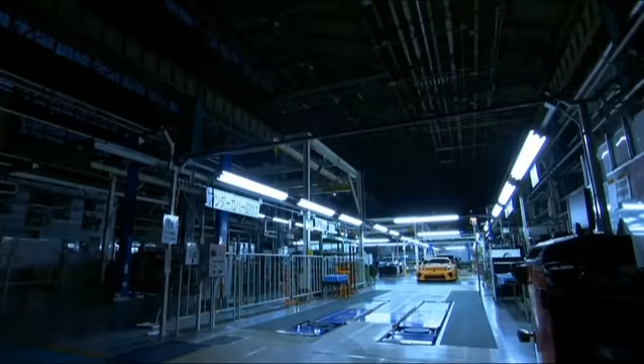Inside this top-secret megafactory, a car like no other is taking shape. Craftsmen hand-build what they consider an automotive work of art. Money is no object. This machine must redefine a billion-dollar brand. Failure is not an option.

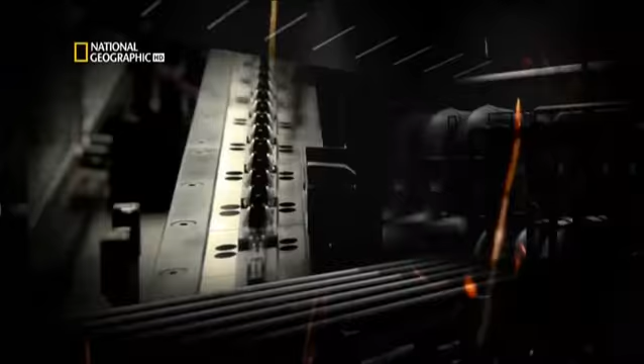Japanese marque Lexus sells itself on luxury, marketing its cars as elegant, quiet, high-tech, and efficient. Now, a different kind of car wears the Lexus badge, the LFA. Aggressive, loud, agile, with the highest revving V10 engine in a production car, reaching 325 kilometers per hour. A car like nothing Lexus has ever produced before.

Lexus is just over 20 years old. The world's largest car maker, Toyota, created the brand to compete with other high-flying luxury marques: Mercedes-Benz, BMW, and Jaguar. It's worked. Lexus is now one of the biggest selling high-end marques in the United States. But now, Lexus is out to inject more excitement into their brand.

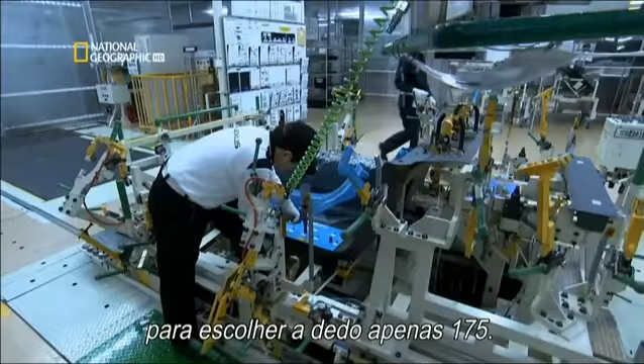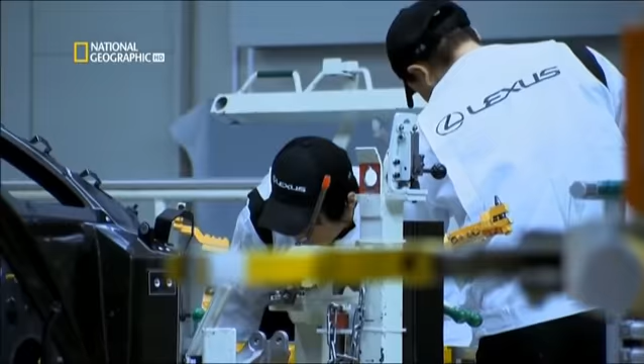All the associates here at the LFA Works feel they are artisans, not just operators. These artisans are known as takumi, Japanese for craftsmen, a status only conferred on the most highly trained, skilled workers. Each and every associate at the LFA Works is seeking to achieve perfection, taking this challenge on with a sort of samurai spirit.

Yamanaka Shigeru is manager of the LFA Works. His teamwork credentials come from another time-honored Japanese tradition: baseball. Before this, I was working as manager of the Toyota Motor Corporation baseball team, which brought people together from lots of different factories. It was because I could manage that organization that I was made manager here.

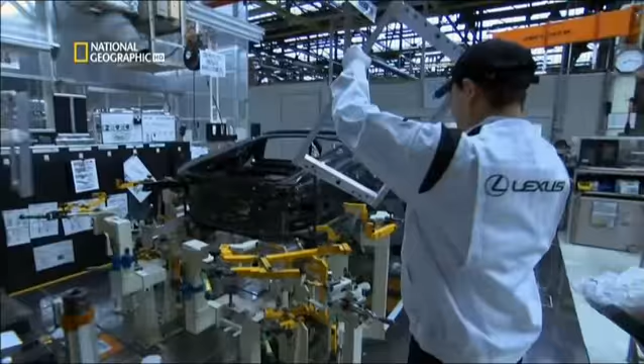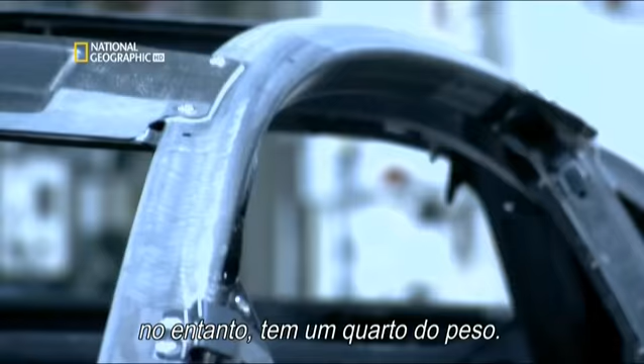To reach their goal, this tight-knit team utilized sophisticated tools and materials to build their car. The most important of these is carbon fiber composite. Carbon is crucial to the car's performance. It's a material 5 times the strength of steel, yet a quarter the weight. It's the construction material of choice for both Formula One racing cars and the aerospace industry.

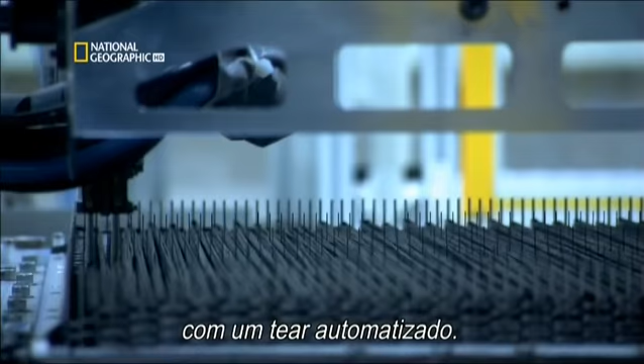The company even make their own carbon fiber here on site. Up until now, no television cameras have ever been allowed inside this top-secret facility. First, simple strands of carbon fiber are woven into a pliable cloth using an automated weaving machine. This fabric is then transformed through heat, pressure, polycarbonate resin, and labor-intensive techniques into the car's core, known as the tub.

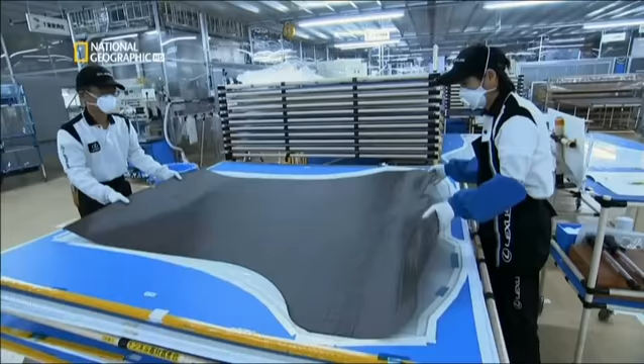The tub is pieced together like a 3D jigsaw. It starts with the construction of the floor. To make it, precisely cut carbon fiber cloth is lifted onto a mold. Next, skilled takumi smooth the supple fabric over the mold. This one is for the transmission tunnel that will house the drive shaft and exhaust.

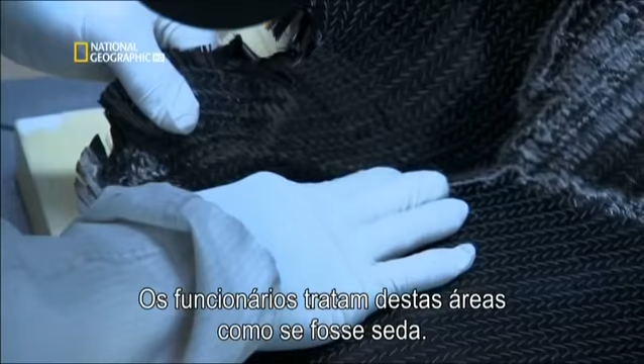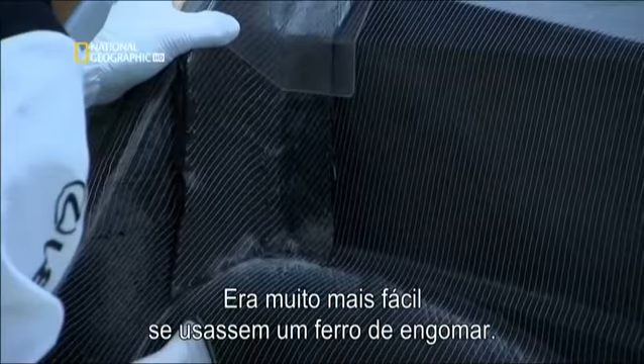In very complex areas like this, the fabric inevitably becomes frayed and not very neat. The associates work with these areas as if working with silk, taking great care every day. They also wear masks to avoid breathing in the hazardous fibers. In the beginning, the associates found it very difficult to work this material. It was much easier when they used an iron.

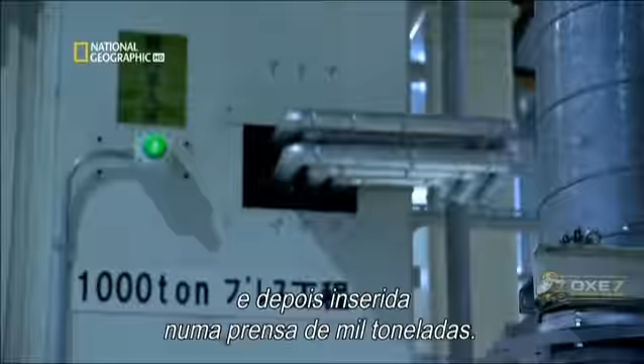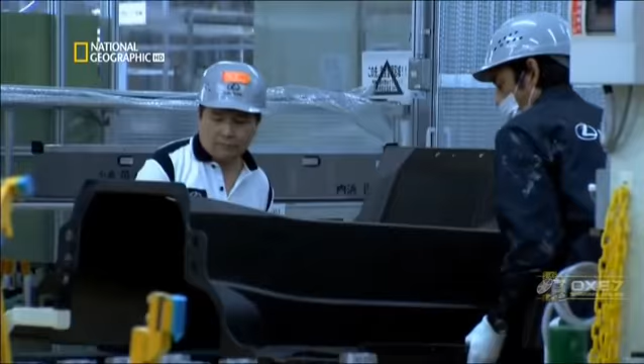Back in 2000, the concept of a world-beating supercar only exists in one man's head. At the company, I talked to just a small group of people at the top, not expecting anything, and they said, go ahead and try.

With permission to proceed, Tanahashi gathers a team of engineers around him, and they start to make the basic engineering decisions. In the beginning, we planned to make the body from aluminium.

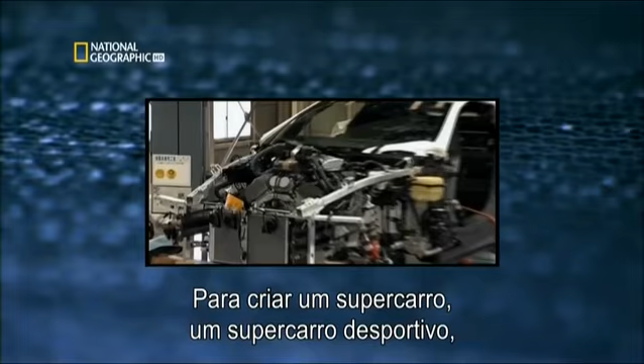But Tanahashi is fascinated with the possibilities offered by carbon. Developing a supercar, a super sports car, carbon fiber was a material I really wanted to try using, if at all possible. But this wonder material has its drawbacks. It's expensive, and the company has never used it to build any of their cars before.

Despite these significant challenges, Tanahashi gets his way. In 2005, my boss said, why not go for carbon? Slapping me on the shoulder. And I made the decision to go for carbon then.

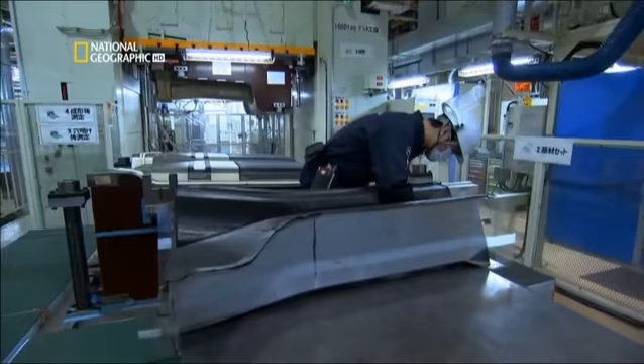It's a bold step. Everyone involved with this project must master a material they have no experience with at all. It was the first time the workers had touched carbon, and everything about it was difficult for the workers.

In the state-of-the-art carbon fibre facility, the Takumi are returning from lunch. They vacuum themselves down to remove any foreign particles before entering a highly confidential sealed room. Here, the majority of the tub's central frame is created using the most intricate techniques.

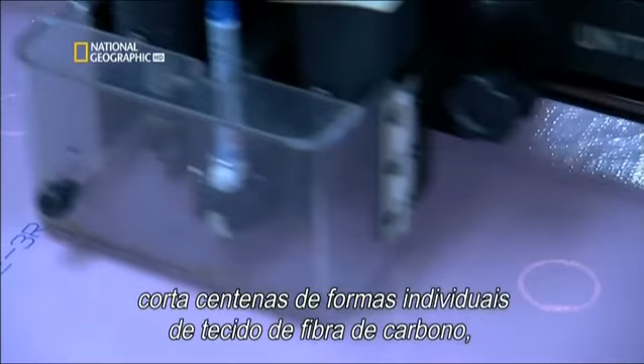In this process, an automated laser cuts out hundreds of individual shapes from carbon fibre cloth that's been pre-impregnated with a sticky resin.

Next, Takumi layer the cutouts, up to 20 sheets deep, onto a mould. This one will make the right side panel.

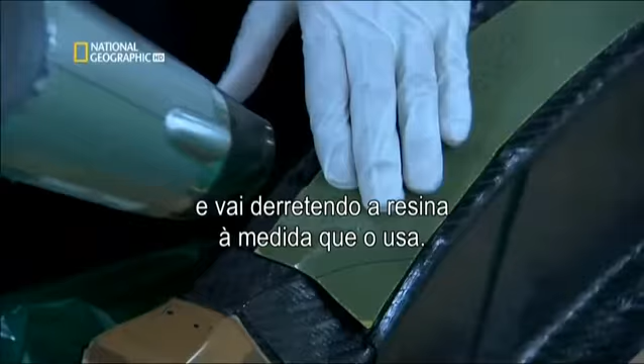The associate uses a dryer to raise the temperature of the laminate and half melts the resin as he applies it. The tacky cutouts stick to each other and any gaps are squeezed out using a vacuum bag that forces them together.

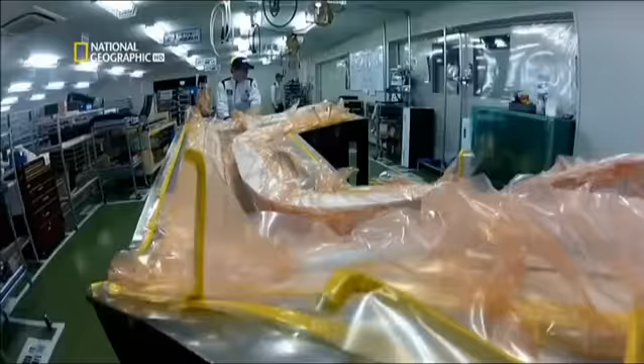The shrink-wrapped side panel is then wheeled across the works and loaded into a pressurized oven. Baking overnight at 150 degrees Celsius sets the resin, resulting in a side panel that's both ultra-strong and ultra-light. An aluminium equivalent would be twice as heavy.

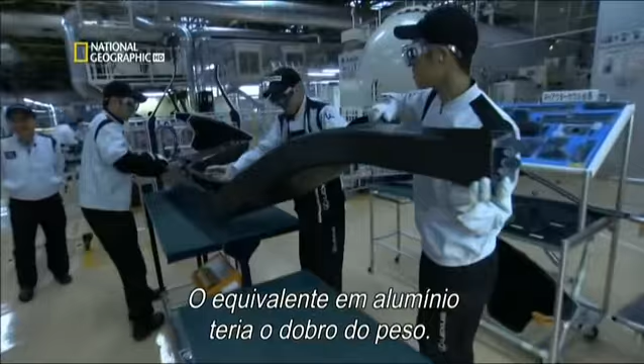Weight saving is the holy grail for all auto engineers. Less weight and more power leads to increased acceleration, and speed defines a supercar. The body of the LFA is 65% carbon fibre, helping it accelerate from 0 to 100 kilometers per hour in 3.7 seconds.

If made of aluminium, it will be 100 kilograms heavier, like having a sumo wrestler in the passenger seat. As it is, this car weighs just 1,400 kilograms all in.

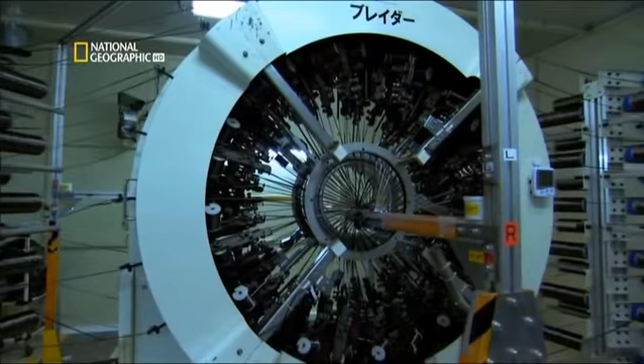Back at the factory, in a locked room, a bespoke machine creates two crucial parts to complete the tub's construction. The roof rails support the windscreen, as well as protecting the driver if the car rolls over.

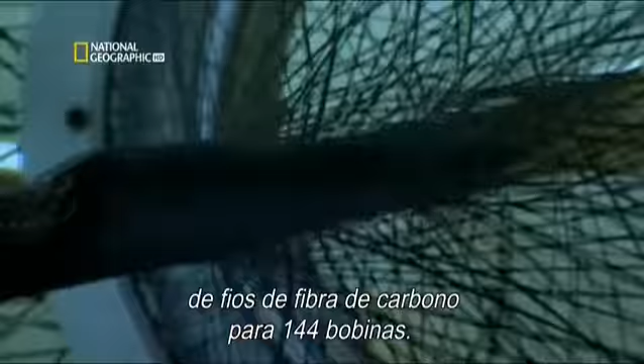This custom-built circular loom weaves the carbon rail in 3D. It uses lasers to control the feed of carbon fibre strands onto 144 bobbins. These knit the carbon around a top-secret automated template that's fed through the centre of the loom.

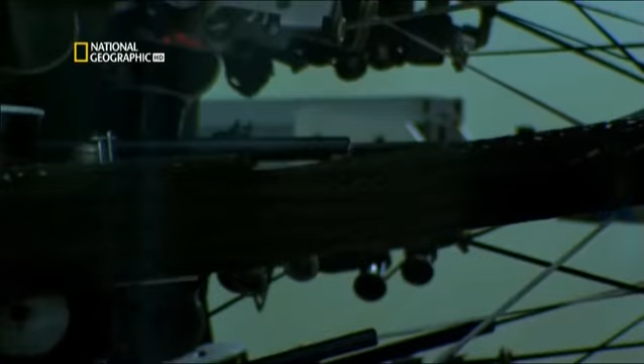This is done twice over to cross-hatch the carbon weave, so giving the rail its strength. The whole mechanism has its own control box, and for good reason. If something goes wrong, even a little thing, the shape gets distorted immediately, so the operator constantly pays attention to avoid this.

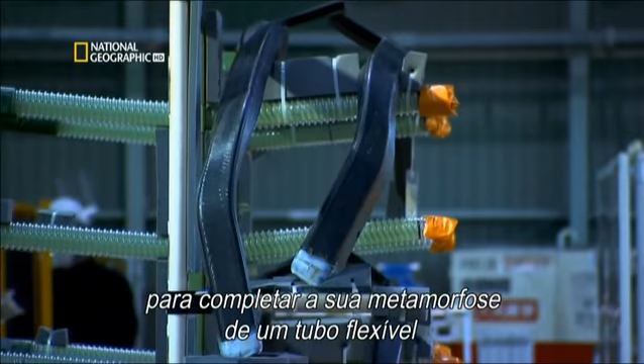The side rail is heated and impregnated with more resin to complete its metamorphosis from a flexible tube to a rock-hard rail. You may think that this is quite heavy, but it is only 2 kilograms.

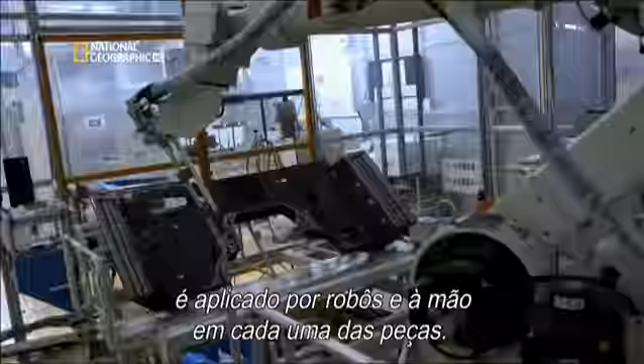The tub is bonded in another top-secret jig. First, a super-strong adhesive, known as epoxy resin, is applied by robot and hand to each of the parts. The separate parts are transferred to the jig and locked in place. Pop rivets keep the pieces aligned.

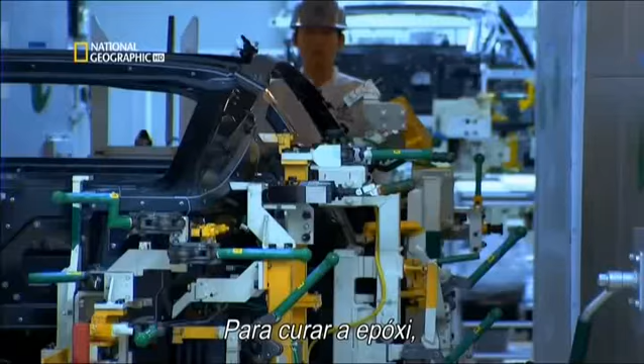To cure the epoxy, the jig is pushed into an oven and then baked for 60 minutes at 60 degrees Celsius. The resulting tub is so strong, it acts as both the structural core of the car and as a crush-resistant safety cell should the car crash.

The challenge now is for Matsumoto Kengo, chief designer of the LFA, to create a car with a body as technical as it is elegant. For us, aerodynamics, heat and airflow management should be tangible in the design.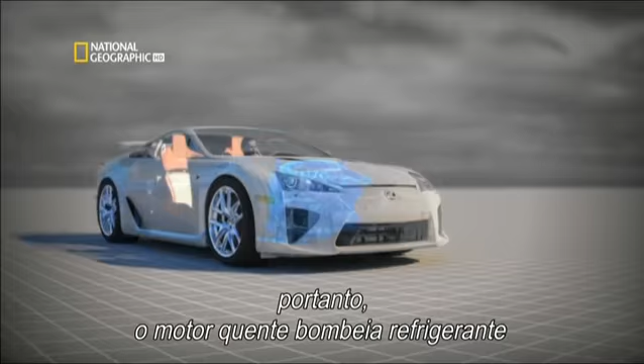A conventional car cools its engine with forward-mounted radiators that suck cold air through a front grille. Not the LFA. Front space is at a premium, so coolant is pumped from the hot engine to twin radiators mounted behind the car's rear wheels. Matsumoto had to shape the car to funnel cold air to these vital components.

Airflow management is optimally controlled by setting the angle between the door mirror and the cabin. It goes past the cabin and smoothly into the air intake for the rear radiator. This shape is not just for styling. The intake is deliberately formed here, from the base of the glass. The result is an airflow system capable of cooling the engine even under the most extreme race conditions.

It's 8:45 in the morning at the LFA works. The Takumi are warming up for an 8-hour shift ahead. Their first task is to greet the bare cabin as it arrives from its 15-day build in carbon round the corner. In assembly, the cabin will progress through 4 positions: trim, chassis, final, and alignment.

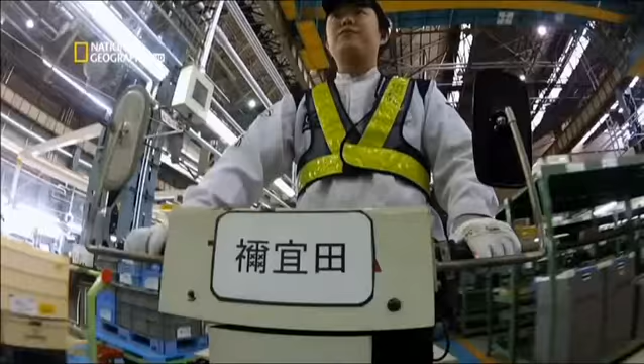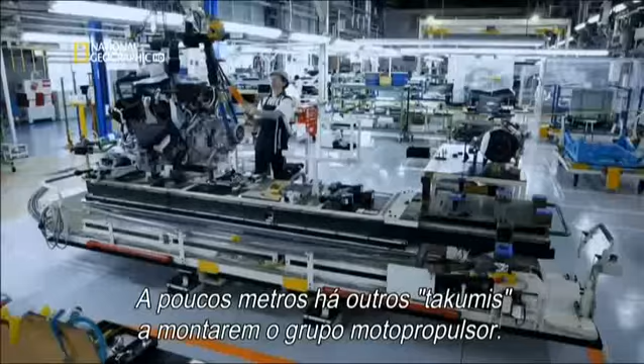15,000 parts go into making an LFA. The first of these are attached here in trim. Just meters away, other Takumi assemble the drivetrain and suspension. The drivetrain comprises the transmission, torque tube, and last but not least, a 4.8-litre V10.

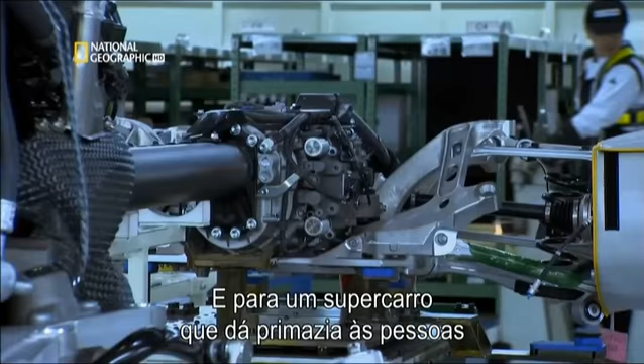The location of this engine is crucial to the car's entire concept. I wanted to build the car around the people in it. And for a supercar that puts people first, the optimum place for the engine is front mid. This front mid location puts the engine between the driver and the car's front wheels. With the transmission placed at the rear, the driver is in the centre and the car feels balanced to drive.

The aim is to make the car's handling as good as possible. But a front mid configuration dramatically restricts the space available for the engine. Tanahashi has a problem. You need an engine of a certain size with a certain degree of compactness, but you want a high-powered engine as well.

Tanahashi needs a small engine to fit in the restricted engine space, but he also needs the power of a large engine because power equals speed.

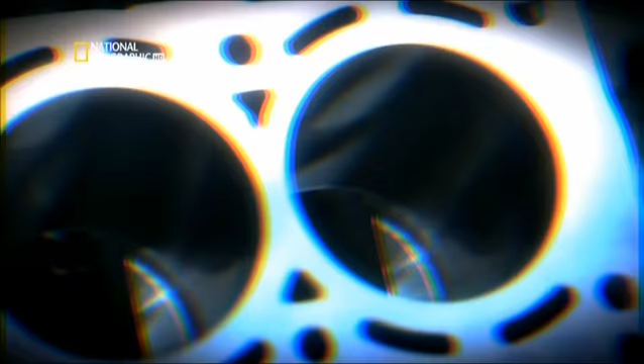And that isn't all. The high-pitched sound of Formula One makes you shiver, doesn't it? I really wanted to have that as part of the LFA. Only a high-revving V10 engine supplies this combination of power and sound, but a traditional V10 is too big for his mid-front configuration. Lexus have made nothing like this before. Their production line cars use 6- and 8-cylinder engines engineered for a super quiet ride. This V10 will be the opposite.

Tanahashi turns to some old friends for help. We are a motorcycle manufacturer. We understand power alone is not enough in a vehicle. For a sports car, small and lightweight is critical.

For almost half a century, Yamaha have worked with Toyota to create high-powered lightweight engines and cars. The legendary 2000 GT, star of the James Bond film You Only Live Twice, and Japan's first true sports car, was the first fruit of their collaboration.

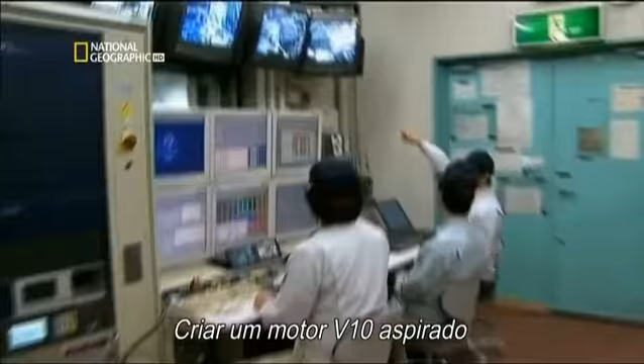Headed by Lexus engine guru Okamoto Takemitsu, the team sets itself an ambitious goal: to create a naturally aspirated V10 engine as compact as a traditional Lexus V8, with the weight of a V6. I wanted to create something different to any other supercar engine.

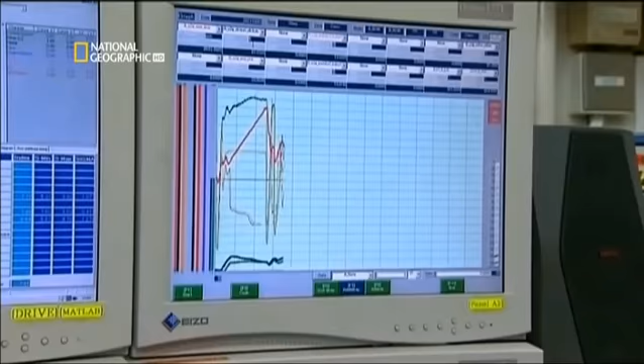Normally, engineers use turbochargers to boost the output of smaller engines to simulate V10 power. But turbocharged engines don't have the rapid response, acceleration or sound of a naturally aspirated V10. By using Yamaha's motorcycle know-how, the lightest metals and redesigning the engine's guts, Okamoto creates a masterpiece of engineering - a non-turbocharged compact V10 that fits into a mid-front design while keeping weight to a minimum.

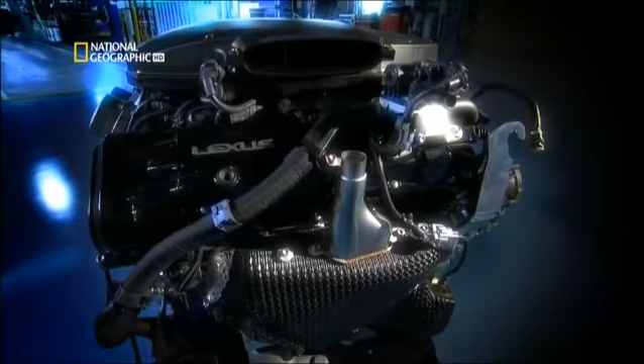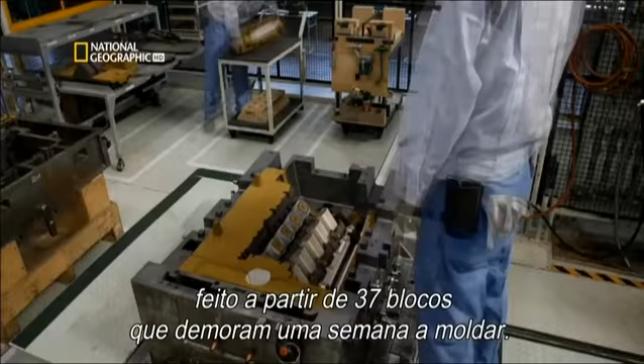The engine starts life in Toyota's Miyoshi plant as molten aluminium. It's cast in a 3D resin-impregnated sand mold made from 37 individual blocks that take a week to fashion. With the blocks fitted together, the mold is ready to be filled. At 750 degrees Celsius, impurities are scooped off the top of the molten aluminium.

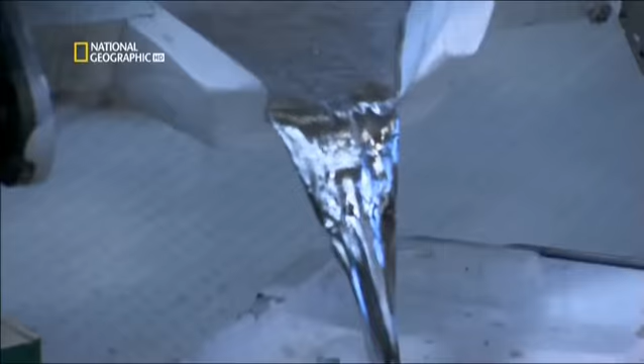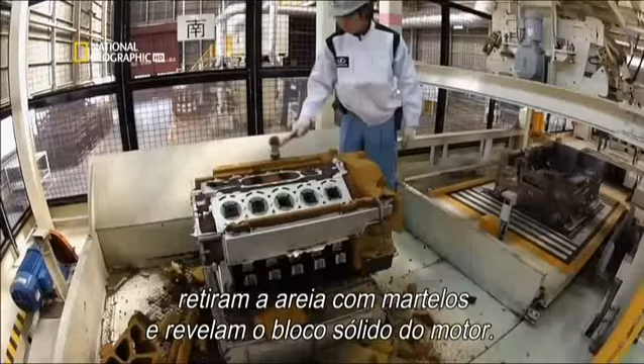The liquid metal flows into the mold as a vacuum sucks out any contaminating gases. Two hours later, with the metal set, the sand is hammered off to reveal the solid aluminium engine block inside.

It's off to Toyota City's Honsha factory and the company's highly confidential Formula One engine facility. These works are always off limits. We're going to go in. Are you ready? Come in. Television cameras have never been allowed in here before.

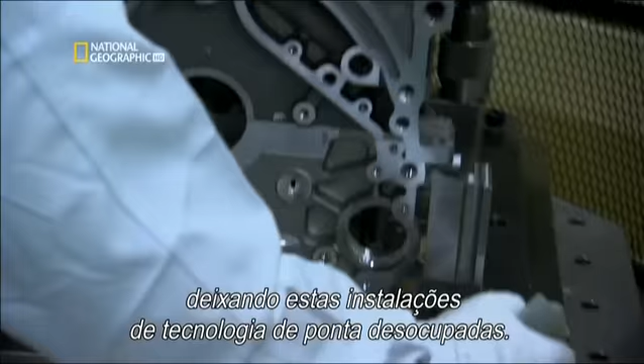For a decade, Toyota spent big competing in Formula One racing. But without a win in 139 races, they withdrew in 2009, leaving this state-of-the-art facility idle. For the LFA team, it was too good an opportunity to miss. The close parallels with F1 engine technology make this milling facility a ready-made fit.

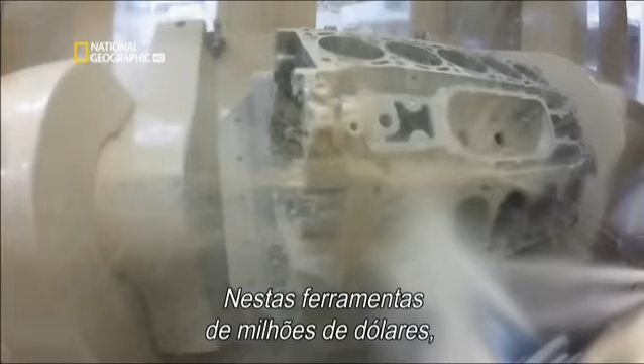In these million-dollar automated machining tools, the rough engine casts are milled, drilled and polished before emerging as precisely spec'd engine blocks.

Then the robots hand over to humans. In a sealed room, Takumi hone every sharp edge using precision polishing tools. Finally, a highly skilled Takumi pre-assembles the finished engine blocks to check they fit precisely. These blocks and heads are paired for life.

Disassembled, they travel as a unit to Yamaha's Iwata city plant, 90 kilometers southeast of Toyota City.

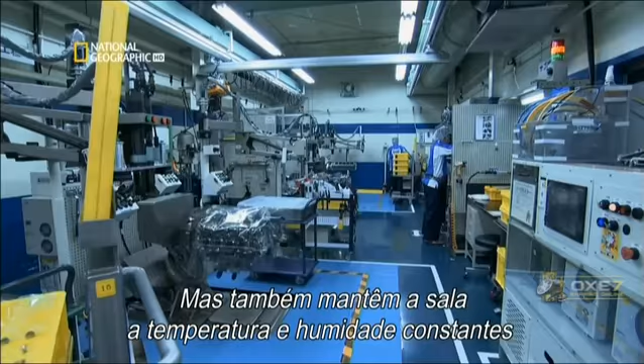The engine room here takes obsession to new heights. As you'd expect, hairnets and airlocks prevent any particle contamination. But the room is also kept at a constant temperature and humidity to ensure that every engine part is at the same state of thermal expansion during assembly. This is more laboratory than workshop.

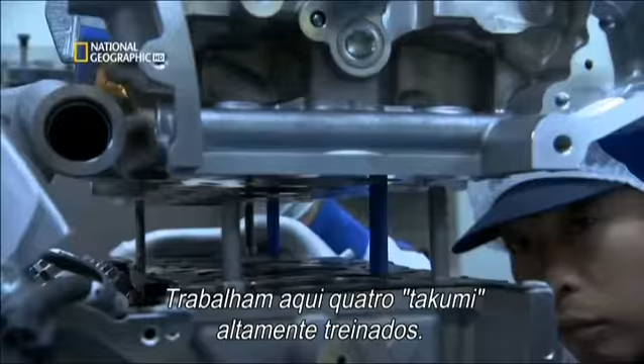The 2,200 engine parts are divided into 61 different kits for assembly by number. Four highly trained Takumi work here. Each is responsible for a single engine from start to finish. To avoid any mistakes, they follow a series of on-screen instructions. It takes 2.5 days to complete the build of one engine.

Each hand-assembled engine bears the Takumi signature.

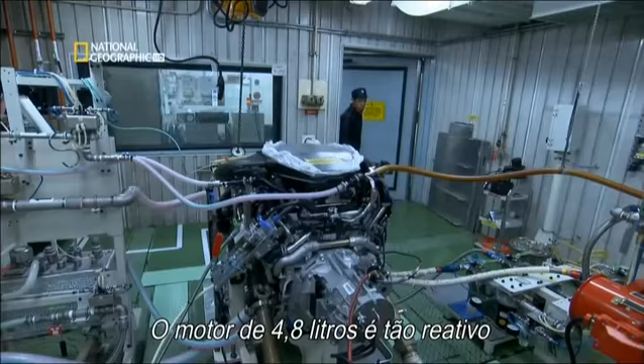Before this masterpiece goes anywhere near a car, it undergoes a half-day of exhaustive testing in the room next door to engine assembly. The resulting 4.8-litre engine is so responsive that it takes just half a second to reach 9,000 RPM.

That means instant acceleration, whatever gear you're in. This engine has excellent response and more RPM than any other commercially available engine. Response time is so fast that a digital rev counter is the only unit able to keep up. And the sound of this high-revving engine is unmistakable.

To achieve the engine soundtrack that Tanahashi insists upon requires more of Yamaha's specialist knowledge.

We are a manufacturer of musical instruments, so when it comes to sound technology, we have a certain level of know-how.

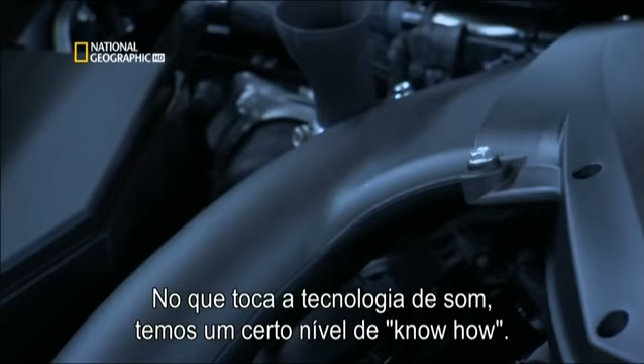Honji Yoshikazu is obsessed with sound. I think the relationship between a super sports car and its driver is like the relationship between a top musical performer and their instrument. When they play in a certain way, they can listen to that sound and use it to produce another, better sound.

Critically, a car has two different sound characteristics. One sound is the exhaust. You can call it an iconic sound. Just by hearing that sound, you know which car it is. The other, which we were particularly concerned with, is the sound heard by the driver.

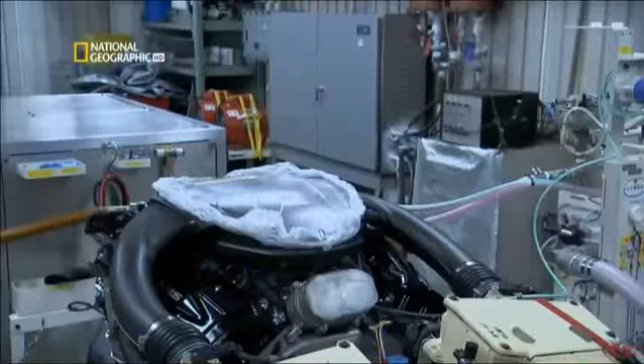To refine the driver's soundtrack, Heiji Maruyama, general manager of Yamaha Motors, had to redesign the component that sits on top of the engine, called the surge tank, by turning convention on its head. The function of the surge tank is to send air equally into all 10 cylinders.

Normally, techniques to reduce noise from the intakes are used. We thought to go the other way and use it to amplify the sound, to communicate it to the driver.

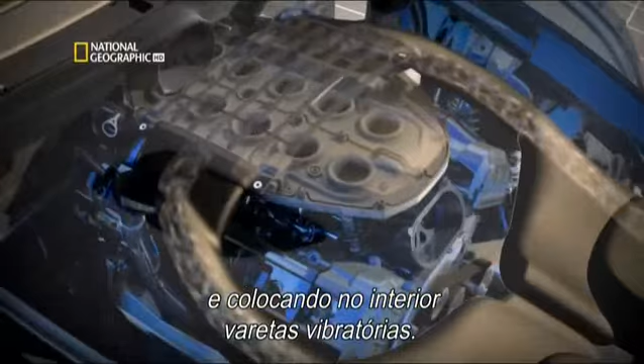Maruyama tunes the chamber by varying the thickness of the surge tank's upper surface and adding internal vibrating ribs. The construction is very like that of an acoustic guitar or violin.

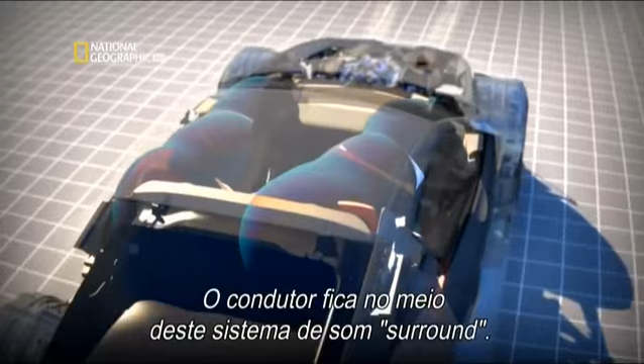The team channel these good vibrations back into the cabin using sound passages. We use these to send low-pitch sound to the driver's feet and higher frequency sounds through at ear level. The driver is in the middle of this dynamic surround sound system.

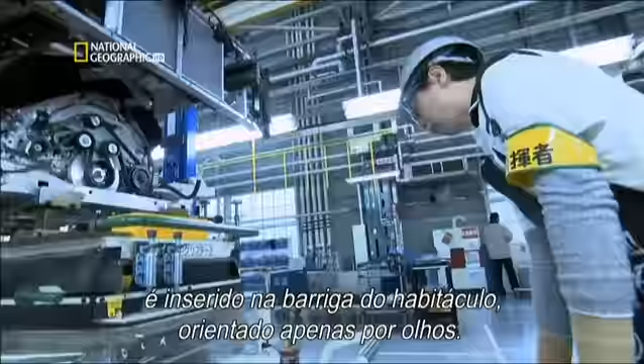The completed engine is forklifted onto a waiting truck for shipment back to the LFA works. Here, as part of the assembled drivetrain, it's inserted into the cabin's belly, guided only by eye.

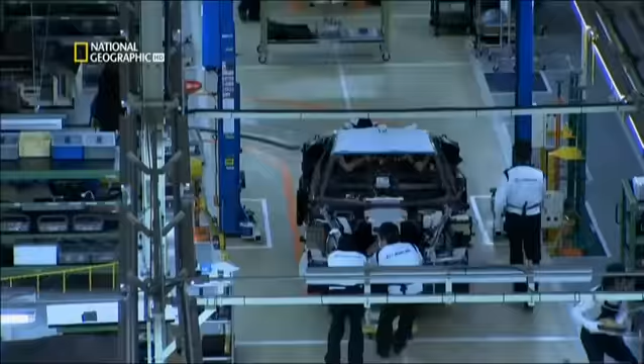With the guts of the car in place, it's time to feed them. An automated pump injects engine oil, brake fluid and coolant into the appropriate under-bonnet opening.

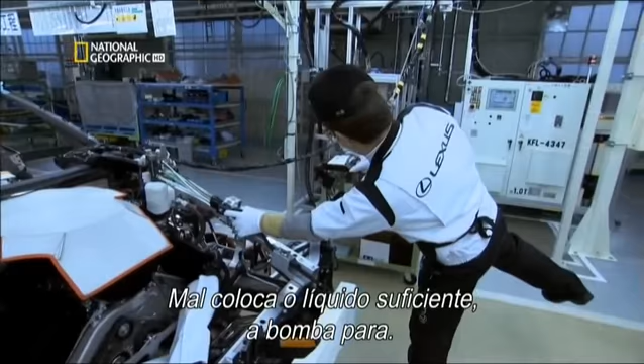In Japan, machines play a tune to alert anybody nearby that they're running. This one plays an American folk song. With the precise volume of fluid added, the pump stops, as does the music.

The car's 9 moulded glass fibre body panels are manufactured off-site. This material is both strong and light, but far cheaper to replace than carbon fibre, should the car crash.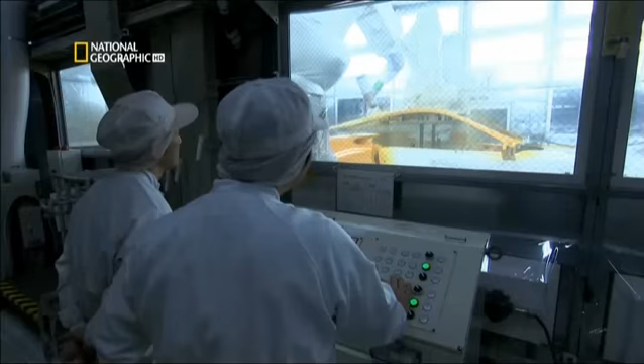The paint shop is under the same roof as assembly, but it's a very different world in here. At the LFA Works, paint is one of the few production processes performed by robot. The company believes they give a more consistent finish.

But there's always an ongoing human battle in the paint department. Dust is the greatest enemy for painting. If dust gets into the paint surface, when it's heated, the dust swells up and causes a blister. So the atmosphere is controlled on a daily basis, and there's a strict dress code.

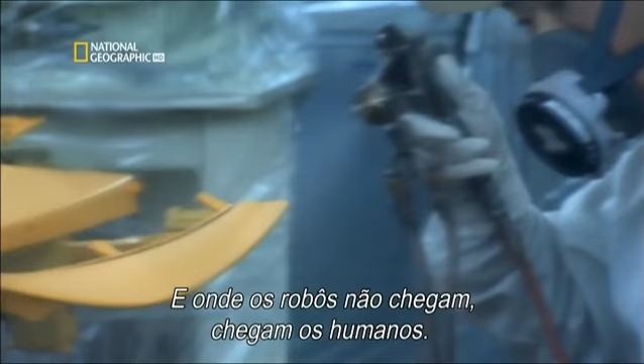Up to 5 layers of paint are applied, and where robots can't reach, humans can. Job done. The sprayed panels are dried in an oven at 100 degrees Celsius for 50 minutes, before being wheeled out for inspection.

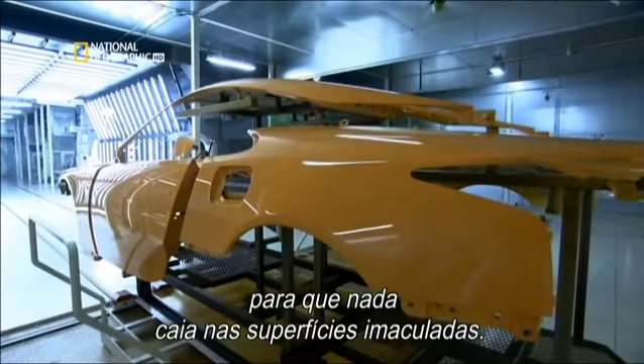The battle against dust continues, with water nozzles spraying a fine mist into the air to stop anything drifting onto the pristine surfaces. A bright light inspector spots any blemishes and marks them up to be polished out.

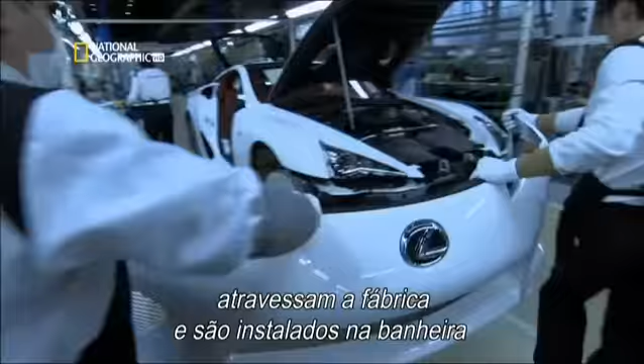The completed panels are wheeled out of paint across the factory floor and attached to the carbon tub back in assembly at the 3rd position on the line, known as final. Here, the hand-stitched leather interior is installed, and the forged aluminium wheels with bespoke Bridgestone tyres are also fitted.

It looks as if the associates are performing each task very slowly, but every one of them is working very carefully and with a high degree of certainty. If you compare it to a sport, they are top players who complete a successful play every time.

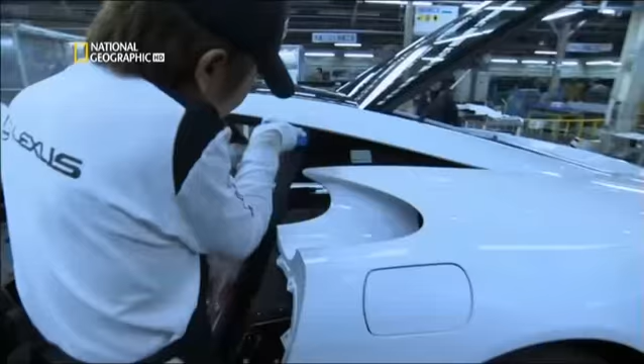The LFA Works runs like clockwork, yet there's no clock watching. The reason why there is so much time is that Chief Yamanaka tells us to take our time and work slowly, so that we can make something that we know is good.

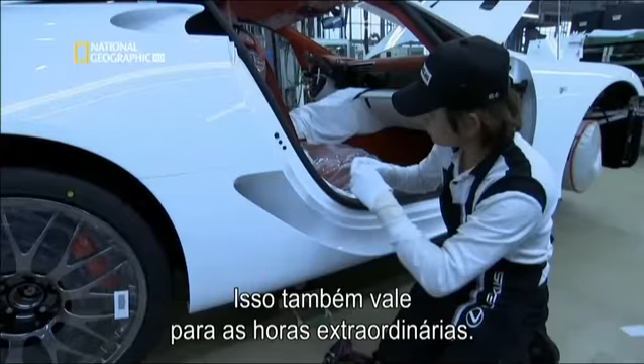How can I put it? He says that in order to ensure quality, we can take as much time as we need. That goes for overtime as well. If it means we make something good, then we can do overtime.

The only stipulation is that one car must drive off this assembly line every day. And from the beginning, Chief Engineer Tanahashi was clear that only 500 would be built. At a car a day, that will take just 2 years. And then, this factory will close.

Making only 500 cars positions the LFA as a very special car. There is no plan to make any more at all, even pricing the LFA at $375,000, the most expensive Japanese road car ever.

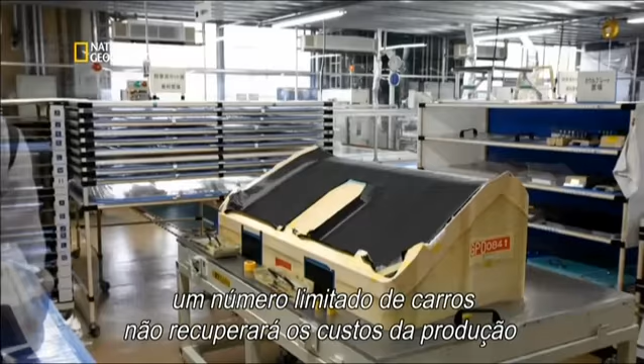A limited production run isn't going to recoup the costs of development, the use of cutting-edge materials, and unlimited overtime. I think it will be difficult to make a profit with only 500 units delivered.

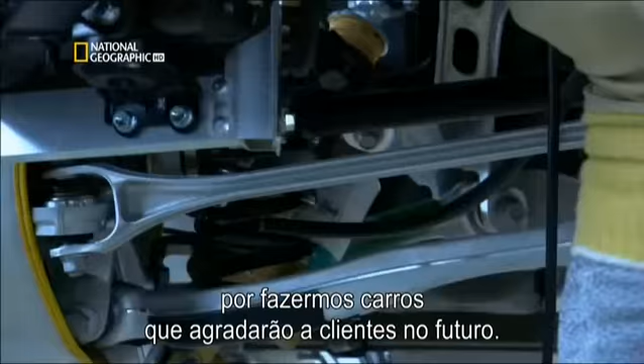But by producing the LFA, the Lexus brand gains in value and is well received worldwide. I think the legacy will be left in technique, knowledge and teamwork for making cars that will please our customers in the future.

Back in 2004, with the prototype build, Chief Engineer Tanahashi takes a bold decision. He wants the car proved on the severest of tracks. Nothing in Japan fits the bill. So he takes the entire development team to the notorious Nürburgring in Germany.

For us car makers, the Nordschleife on the Nürburgring is like a mecca for cars. This is where this car was honed.

The 20-kilometer Nordschleife section of the Nürburgring is infamous as the world's most punishing test track. For 4 years, the team tests every aspect of the car's engineering around the Nordschleife's dips, jumps, relentless corners, and flat-out straights.

The car's development makes progress towards its production deadline, but Tanahashi wants to fast-track its fine-tuning. In 2008, he throws it into the unforgiving world of racing and enters the Nürburgring 24-hour race. It was purely to get more feedback on the production type LFA and to improve it under real race conditions.

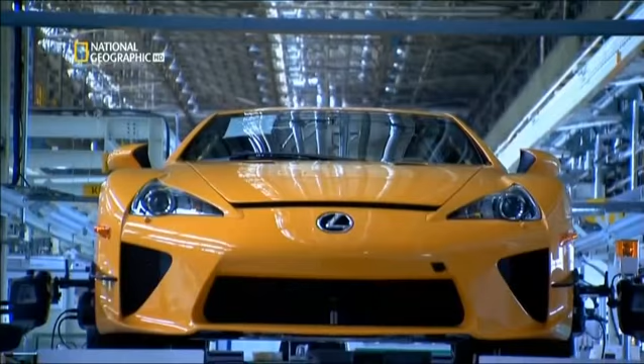In 2011, a special race edition of the standard LFA is launched. Its name pays homage to the racetrack that forged it. It is with thanks to that sacred place that we called it the Nürburgring package.

This Nürburgring package has a retuned engine which pumps out 571 horsepower, 11 more than the standard engine.

This extra power requires more downforce to keep the car on the track, so the rear spoiler is larger and fixed.

Left and right canard fins on the car's front bumper also increase downforce. The stiffer lower suspension makes it more suitable for a life on the track.

Finally, to increase acceleration, the computerized transmission is upgraded to change a split second faster. It all adds up to a Japanese supercar. Only 50 will be built, each with a price tag $70,000 more than a standard LFA.

Back at the LFA works, in assembly's last position, the wheels are aligned to ensure the car handles perfectly. After 3 days in assembly, the car officially moves to inspection.

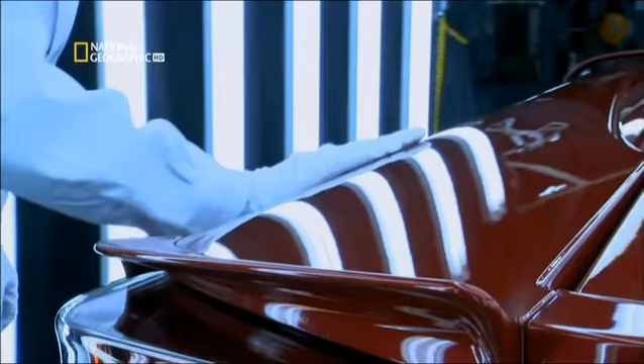You have to touch it gently, like I'd touch a woman. I've been doing this job for 30 years. If I didn't have my wife, then it would certainly be my lover.

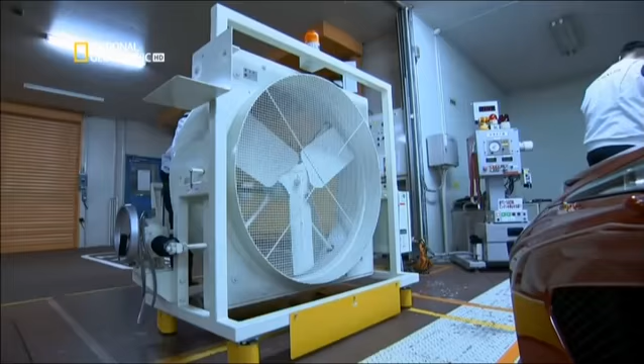With the internal and external surface inspection signed off, the car leaves the LFA works for good. It's driven through the Motomachi plant into quality control. This will be its home for the next 7 days.

The checks performed here range from speedometer and brake tests to water tightness. The reports fill a 350-page booklet.

Finally, test driver Amano Nobuaki ensures each of these cars is road ready when it leaves the factory. The car is bedded in on Motomachi's very own test track. The masked sections of the bodywork are to protect vulnerable areas from stone chips.

I think this is the best possible job in the world. Amano checks the car's controllability, engine sound, power, braking performance and vibration noise on the 1 kilometer track.

There is one danger driving this car every day. Every now and again, I just want to forget the job and drive this car away somewhere to have for myself.

This car is complete and ready for its owner. To date, all 500 LFAs are spoken for. No more will be sold. The Lexus brand is safe, but Tanahashi still has something more to prove.

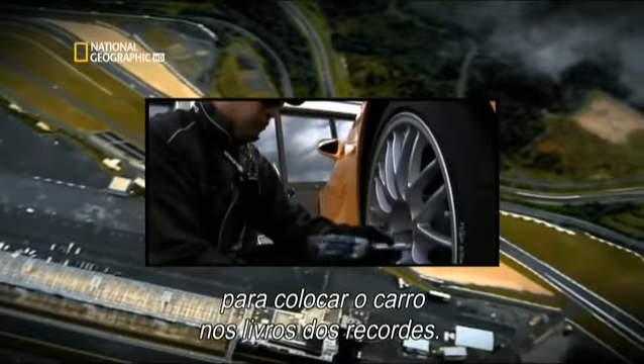In 2011, the team reassemble at the Nürburgring to put the car into the record books. They're out to beat the fastest official time by a road-registered production vehicle. This is the chance for the Nürburgring package to prove its pedigree.

With test driver Ida Akira behind the wheel, the team held their breath. I pushed the car on every corner. There are over 150 corners, driving very aggressively, but at the same time, I enjoyed it.

To beat the record, Ida must average 167 kilometers per hour over the track's 20 kilometers. I had no concept of the time when I crossed the finish line.

Seven minutes, 14 seconds. The fastest official time by a production car not using slick race tyres, and the 5th fastest time ever. It was an unbelievable moment. It's one of the best moments of my life.